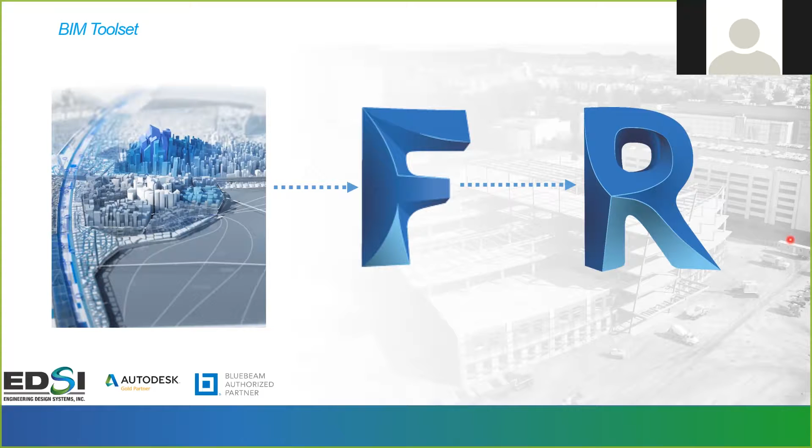The value of FormIt and Revit. There are a couple key takeaways from this workflow that we would really like to emphasize to everyone. When it comes to conceptual massing, FormIt models become Revit mass families, which support wall by face, curtain system by face, and roof by face.

FormIt levels become Revit levels and support floor by face and floor plan view creation. FormIt models with materials applied import to Revit with materials intact for visualization.

When it comes to conceptual modeling, groups in FormIt can be categorized to Revit to become Revit families, such as generic models, furniture, or specialty equipment. FormIt models can be imported into the Revit family editor to create RFA of any family category with materials. Revit families can also be exported to FormIt and then in the future converted back to the original Revit family.

The interaction between FormIt and Revit. The import FormIt to Revit command adds FormIt models into an existing Revit project. The FormIt origin point and the Revit base point are used for reliable placement of imported FormIt objects. The group name in FormIt is remembered upon Revit import for use with Revit filters, and Revit system families can be exported to FormIt using SAT export options.

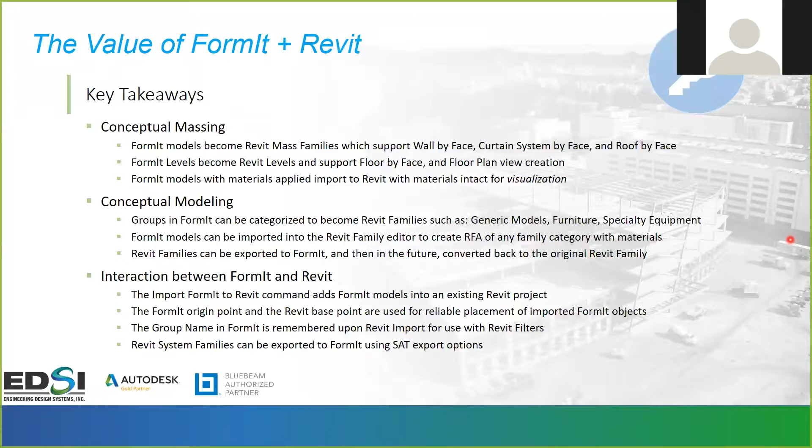The base file format of FormIt is from a 2016 platform. When importing to 2017 and 2018, you will notice a model upgrade dialog box. Depending on the file size is how long this process will take. The example you are about to see took a few minutes, but no more than 10.

As you know, if you put in location information in FormIt, Revit keeps that information and reads it. Additionally, masses typically aren't visible in plans and elevations, so you will want to ensure that these are turned on. That way you can see the imported information. The levels transfer and are present, but there are not views automatically created to go with them.

There are a few differences when it is converted to Revit 2017 versus 2018. 2017 will not retain material information, but 2018 will. 2017 will import sections as masses, and 2018 will only import sections if they are turned on and visible within FormIt.

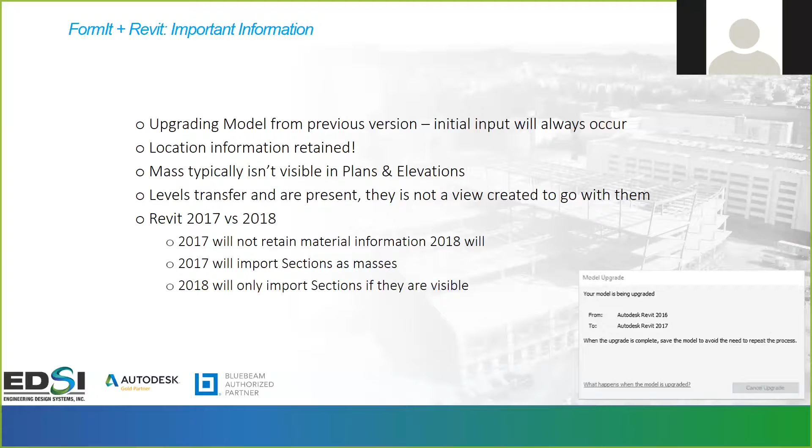Okay, now let's move to the software demonstration. Excuse me. So if you joined us for our last webinar, this is the model that we have created. This is our conceptual design for the model that we will be doing. And the white boxes you see are just some periphery information for site context.

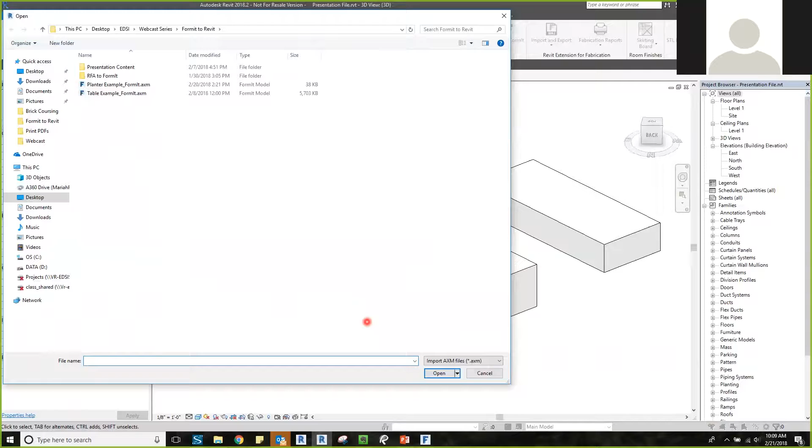When we move to Revit, I have already imported this to save us time. But to import, you would go to the Add-ins tab and then the FormIt converter. If this is not available on your machine already, we can easily provide you with a URL to download this. Under the import FormIt, you would want to import your FormIt to Revit. This will bring up a dialog box. You path to your selected file, and then you click open. As we know, it'll take a few minutes, but not very much at all.

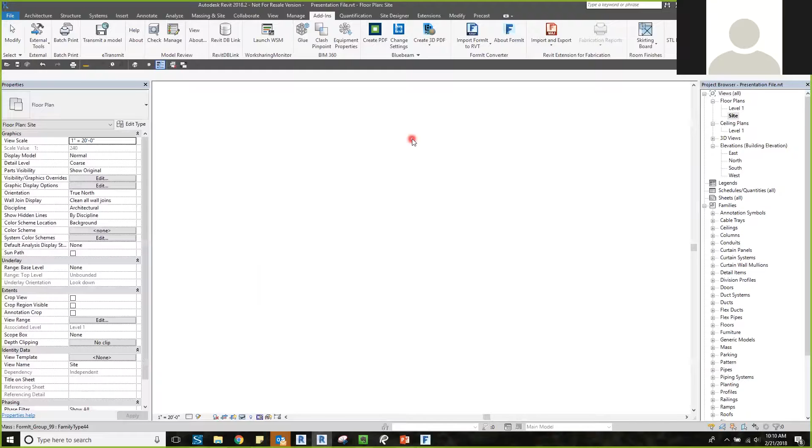So one of the most important things when you first import is to understand whether you have set a location within your FormIt model. If you have, one of the first things that we want to do is to set our true north versus our project north. One of the easiest ways to do that is to have a level 1 plan and a site plan open concurrently.

As we see the site plan on the left-hand side, it is rotated and its orientation in the properties palette is set to True North. If we look at the level 1 plan on our right-hand side, under its properties palette, it is set to Project North. This is probably typical of most of your workflows. Now, to set Project North, a lot of times what many people would do would be to select all the geometry and rotate it. But Revit has a nifty little quick tool for us that helps us rotate Project North.

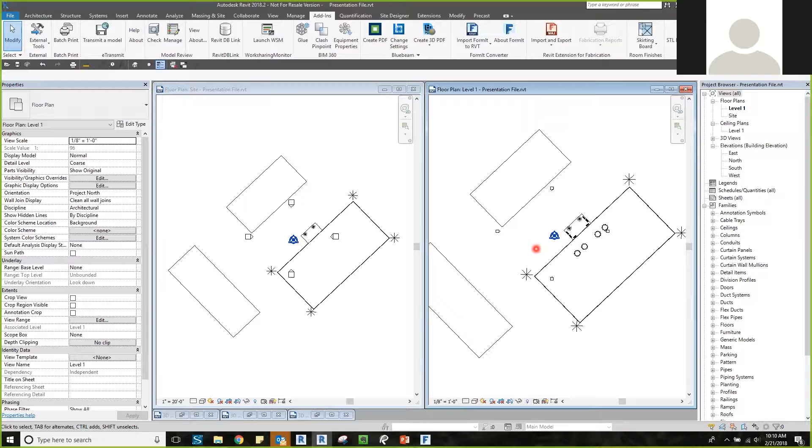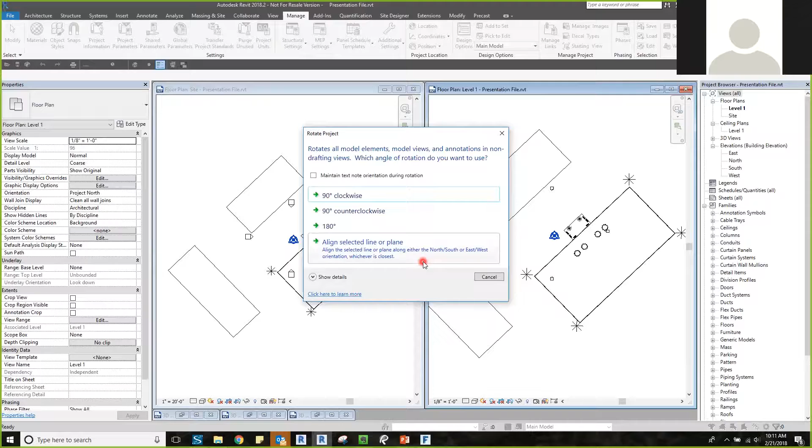It is located under Manage, Project Location Panel, and then Position. We want to select Rotate Project North. This will bring up a dialog box that will give us our options that we're allowed to use. We're going to use the Align Selected Line or Plane. I will come into level 1, zoom into a line that I know I would like to be horizontal across the page, and click this line. Revit will sync, and it will automatically alert you of the number of items that have been rotated.

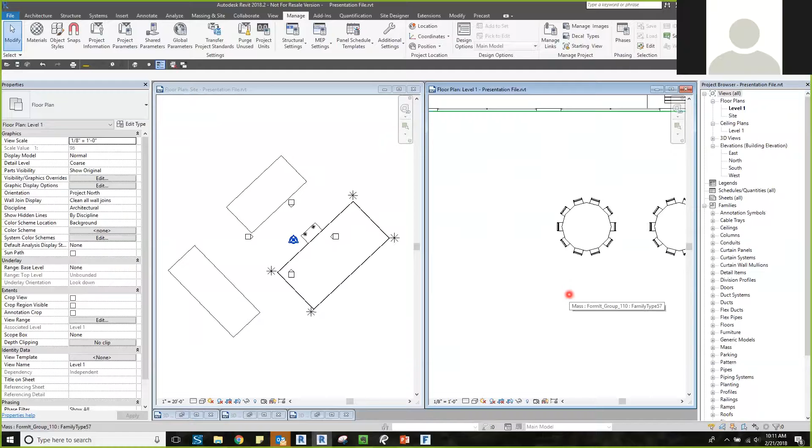Simply press OK. Now, if we zoom out and compare our level 1 on the right to our site plan on the left, we can see we have our True North versus our Project North now set. And if you want to double check even more, you can go back to FormIt. From your top-down view, you can see how the True North arrow is pointing north and our buildings are slightly rotated.

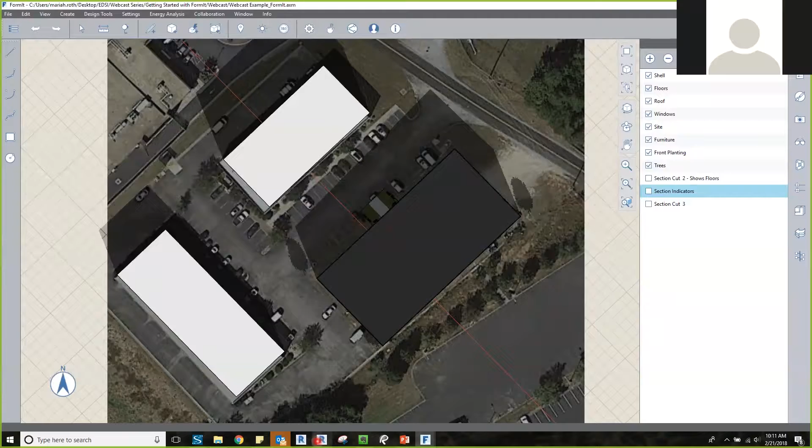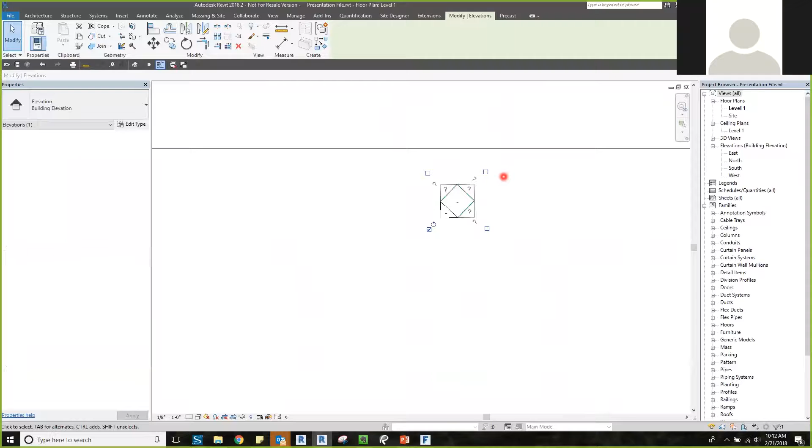Enlarging level 1 plan. As we see, Revit does rotate other annotation items, such as our elevation views. This is an easy element to correct. If we zoom into one elevation and select the building elevation, we see this circular rotate item that appears. If we click on this, it will easily snap to an orthogonal view in relation to Project North.

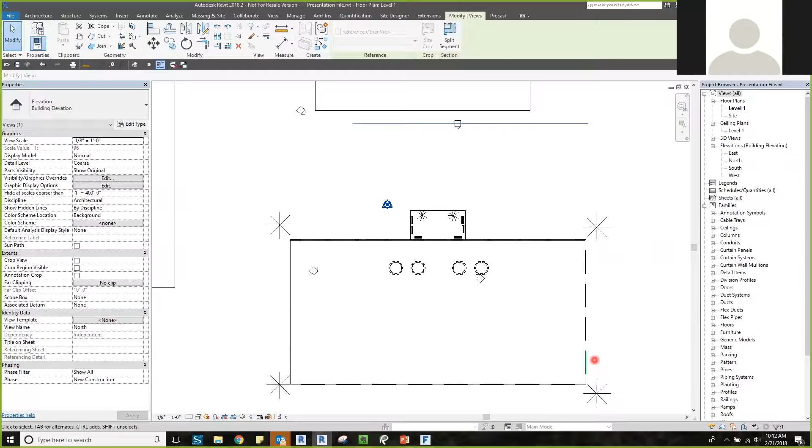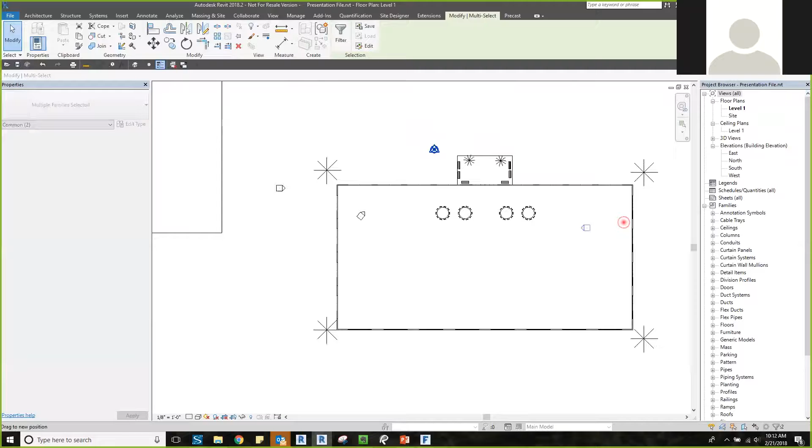And of course, we want to ensure that this is our north view in relation to where our project is now sitting. So I'm going to do these for all of the views and kind of place them a little bit closer to my building. Now we have our Project North and our orthogonal elevation set, and we're ready to continue working.

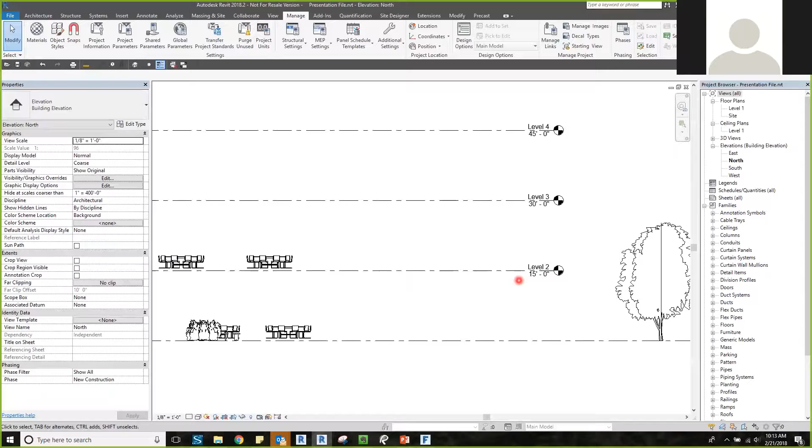One of the other items I mentioned was levels. As we see in our project browser, we have our level 1 and our site. But if we go to our north elevation, we see that we have our level lines created. And as we know, the black represents that there is not a view to go with them.

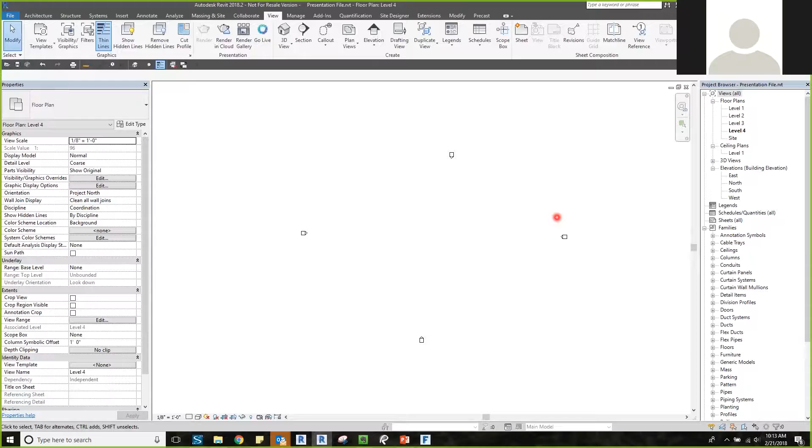So if we go up to View, Plan Views, and Floor Plan, we can now create the other views in relation to our levels that were already created. And as you see in level 1, we are able to see the mass import. On level 2, not so much. So as I told you all, you need to make sure your mass is turned on, and it wasn't turned on in mine. And now we're able to see the import.

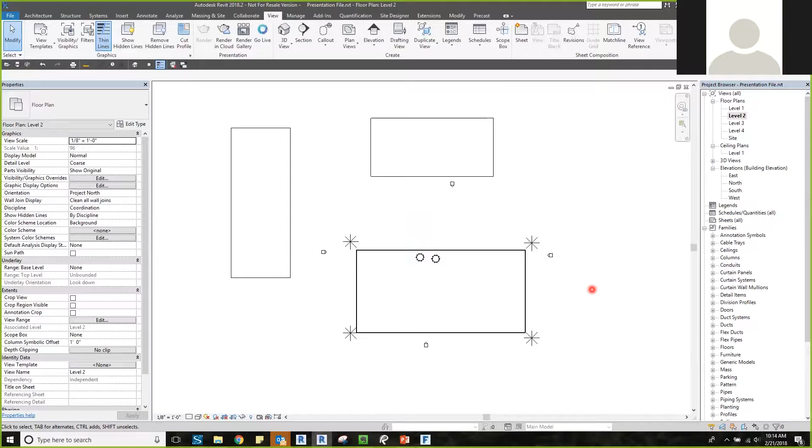All right, moving forward, using your FormIt model to create your Revit geometry. Currently, all of what you are seeing on your screen is the FormIt import. There is nothing in here that is Revit geometry yet. I find it easiest personally to use either a shaded, consistent colors or realistic type of view to be able to place your walls and other items.

To place your Revit walls based on the FormIt model, there are a few ways you can go about this. You can go under Massing and Site, and then select Wall on the model by face. It will automatically bring up the wall command with the picked faces option already selected for you. Additionally, you can use the keyboard shortcut command to get to this and choose pick faces yourself, or you can use the wall command under architecture and still get to this command. The choice is yours in whatever workflow you want to use.

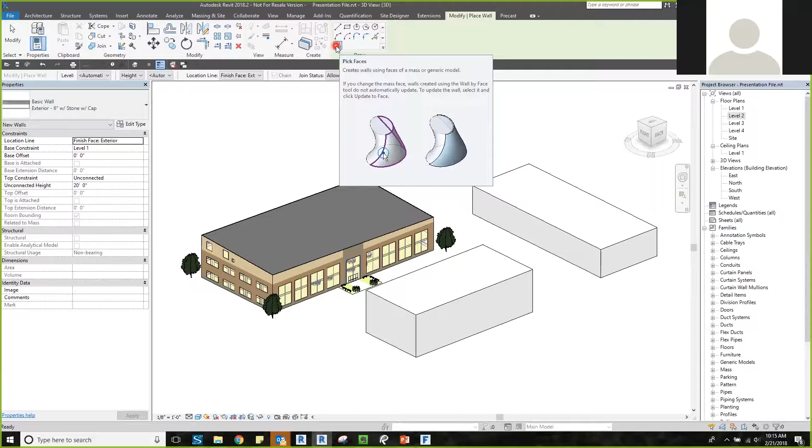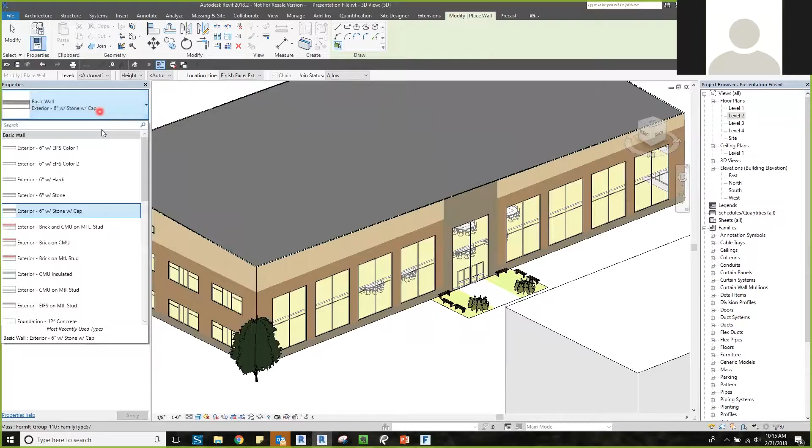We'll see our options bar appear just as any other time we are creating a wall. The one thing we really want to pay attention to this time around is our location line. For this particular example, we are going to use the finish face exterior, as I know I want to keep these specific bounds moving inward from my building. So under our properties, we want to ensure that we have our proper wall selected.

So I will zoom in to the FormIt model, and if I hover over, you can see the green selection line is picking that almost a water table reference to place the wall. If we simply click in place, you can kind of now see an overlapping geometry of our FormIt model and the Revit model.

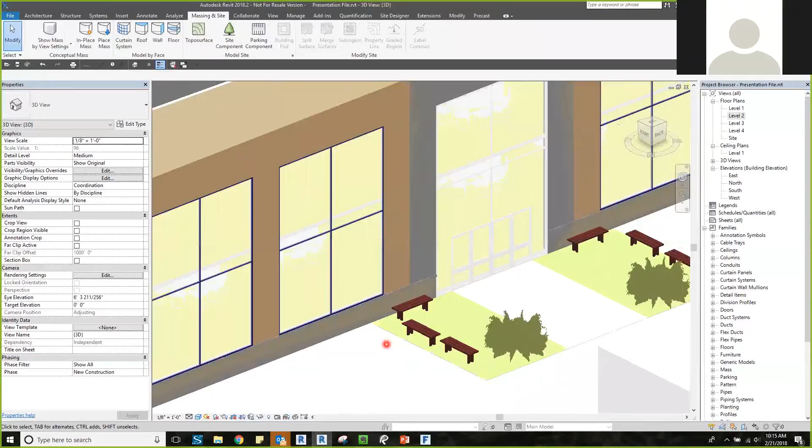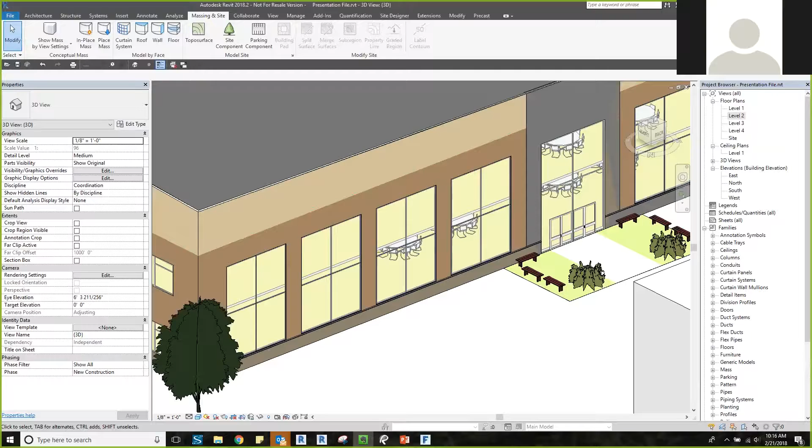As reference, FormIt will recognize if you have placed a dividing line, such as what you see right here between the two tan colors within Revit. This can be useful for water tables, splitting elements such as different materials in Revit, whatever you would like to use. So I'm just going to go through and as reference create some more walls for us so that we have some understanding of how our FormIt model transforms into a Revit model.

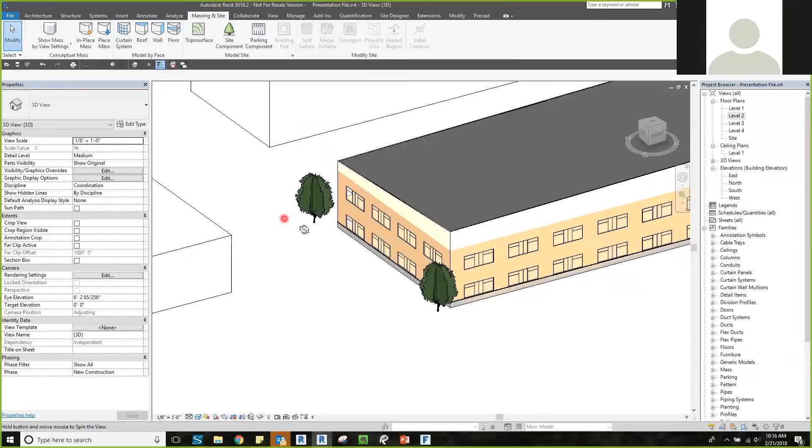All right, moving on to doors and windows. Unfortunately, doors and windows are a little tricky going from FormIt to Revit, and that is because they are hosted elements, and FormIt does not understand hosted elements at this time. We must consider if the openings that we consider windows are true window elements or if they can be referenced as a curtain wall.

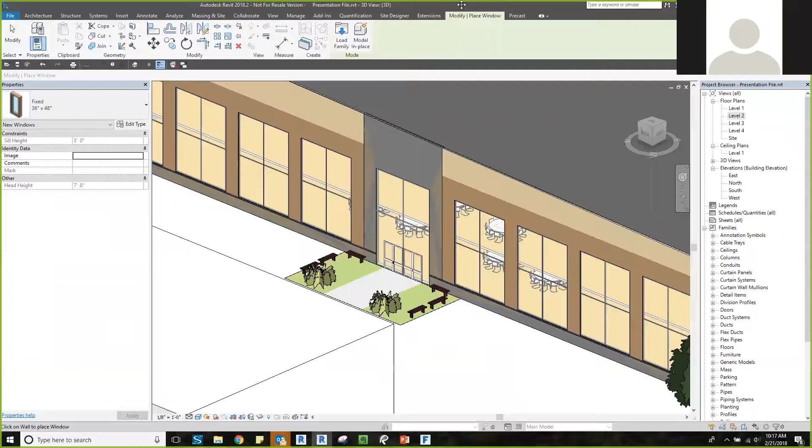If they are a true window element, such as this one that I have selected, we need to ensure that they have a proper host to live in, such as the wall that is extending up in the front facade. In this instance, we can easily place these in here and they will go and be hosted. Now you don't see these cutting through because the mass of the FormIt model is still behind our Revit geometry.

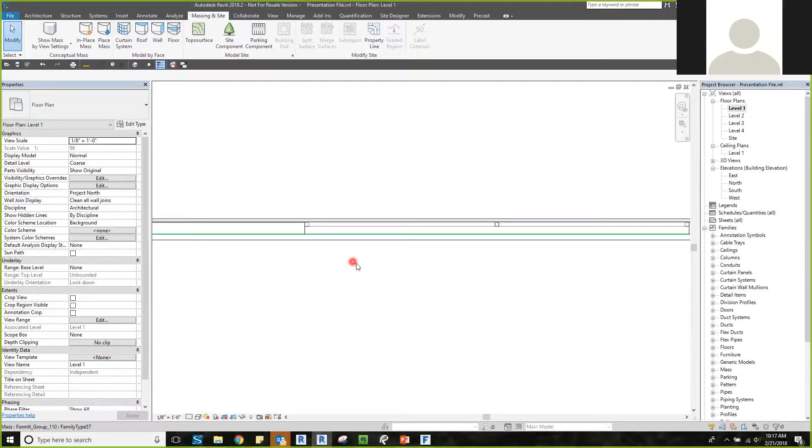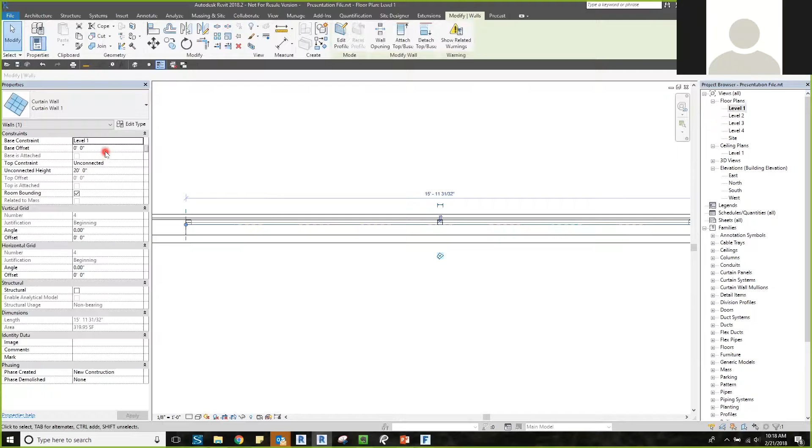If our openings are to be something of a curtain wall, like what you see here on the front facade, something of this scale is easiest to quickly redraw and place your mullions where you would like to have them placed. So what you can do is go to level 1, do a wall, curtain wall 1, place it here. And of course, we need to ensure that our constraints are properly set.

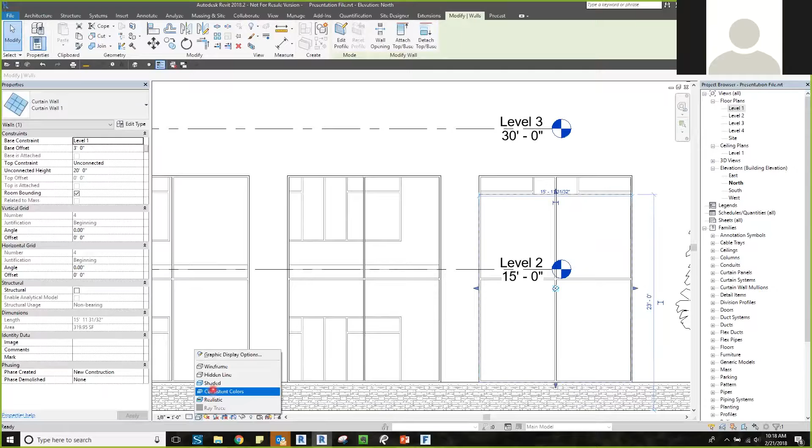And if we go to our elevation, again, didn't make sure my masses were turned on. We can now see that our curtain wall is here. Let me turn this on consistent colors as it'll be a little bit easier to see. So we can bring this up. It automatically will snap kind of to those imported elements.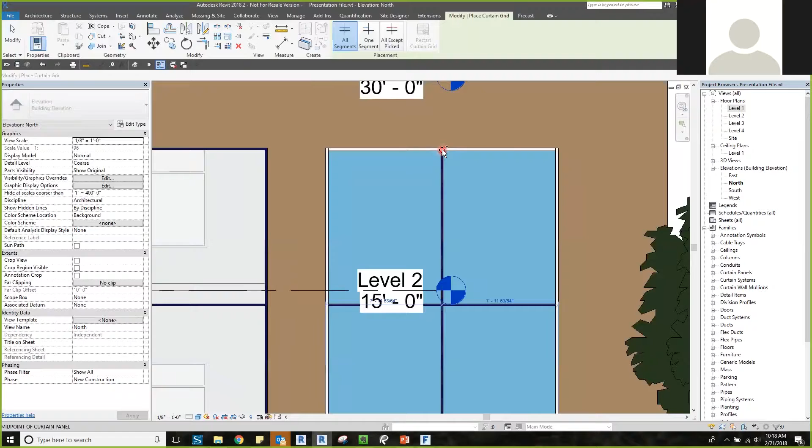And then we can come through and place our mullions on all of our grid lines. Create some additional grid lines that are directly splitting the curtain wall element. And then in this instance, it would just be easiest to simply copy and move from place to place.

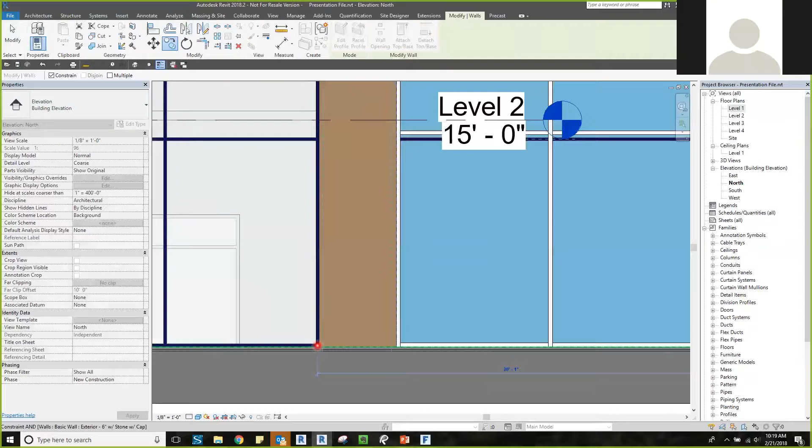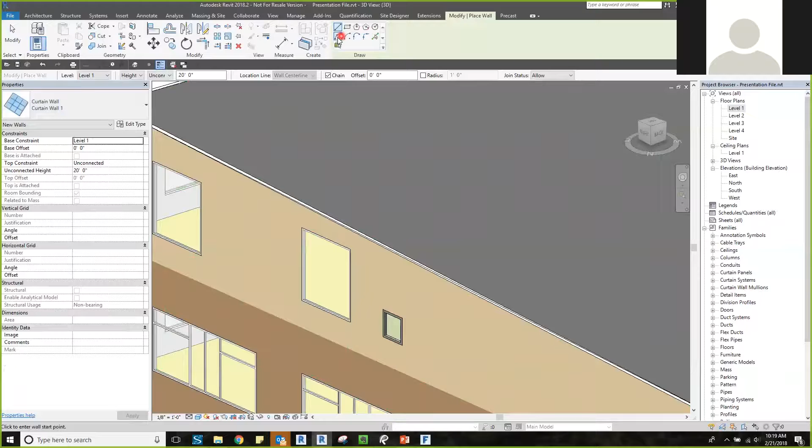Sometimes, not always, Revit will recognize elements such as this square window. It will recognize the glass. So you can use a curtain wall to do a pick faces and it will highlight that interior portion of the glass. You then in turn would just have to stretch the mullions to where you would see them fit.

Unfortunately, this does not work on the larger elements because Revit reads all of the individual glass planes and then will try to create a curtain wall system within each one of those. And you'll end up with multiple mullions that would not be useful. That's why in this case, it is just simpler to redraw.

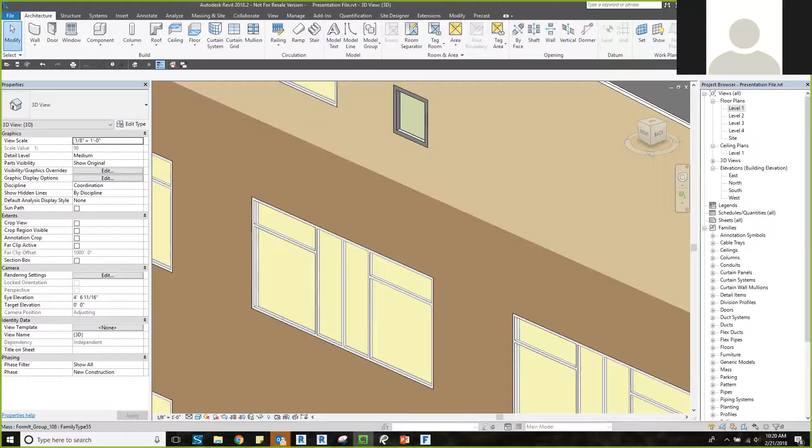When it comes to doors, they are, as we know, a hosted element. So you just have to place them in as a typical door. There's no workaround like a curtain wall to place doors or anything of that sort.

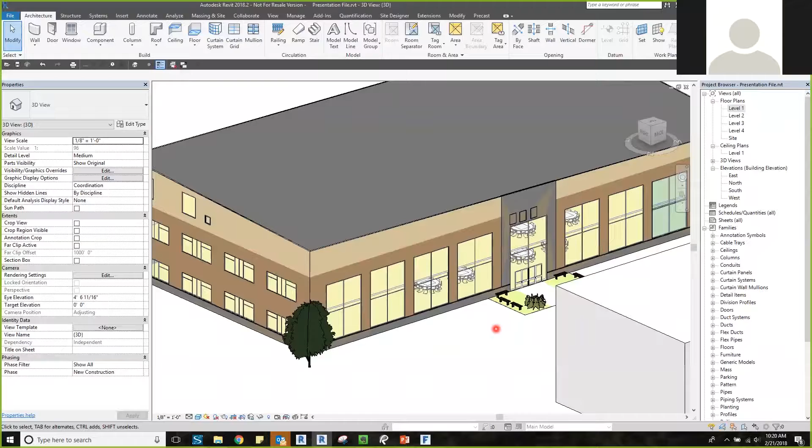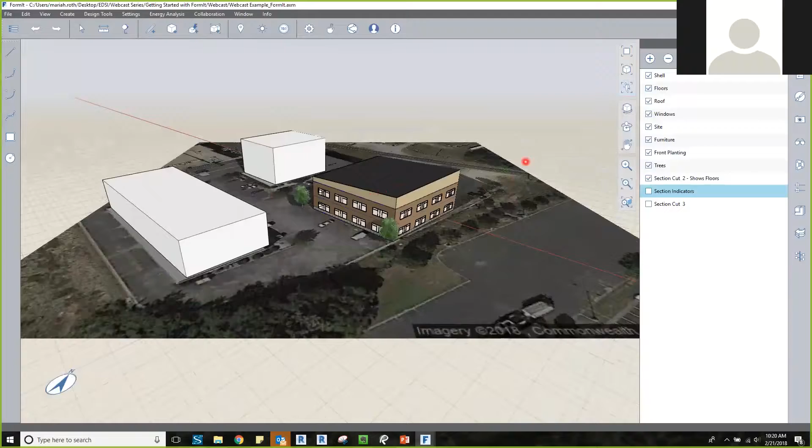Moving forward with floors. Floors have a very specific workflow that begins with correct modeling techniques in FormIt. As I switch back to FormIt, and I turn on a section cut that I already have, and we zoom in, we can see this blue line that is indicating our levels that are in here. The bottom plane of your floor mass needs to be snapped to this blue line. That way, when you bring it into Revit, we can easily place floors.

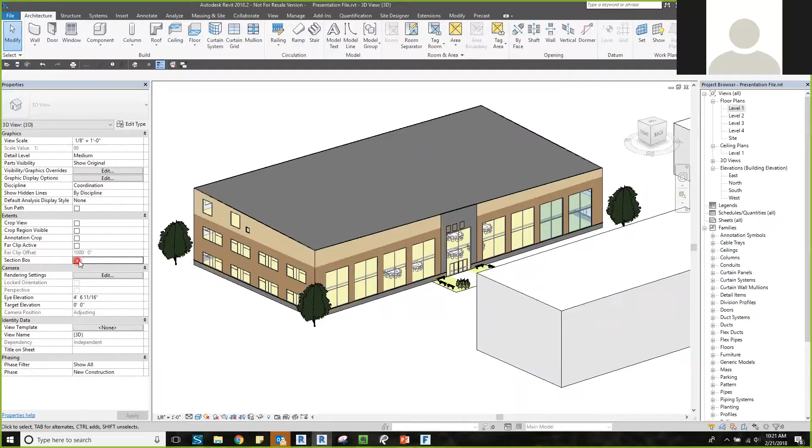So I like to turn on a section box within a 3D view and kind of bring it back a little bit and cut that front facade off. I then can go to the massing and site and floor, and I can do a select multiple. Now what you will want to do is hover over the bottom plane of that floor that you created, and you will see a mass floor family type, level 1 face.

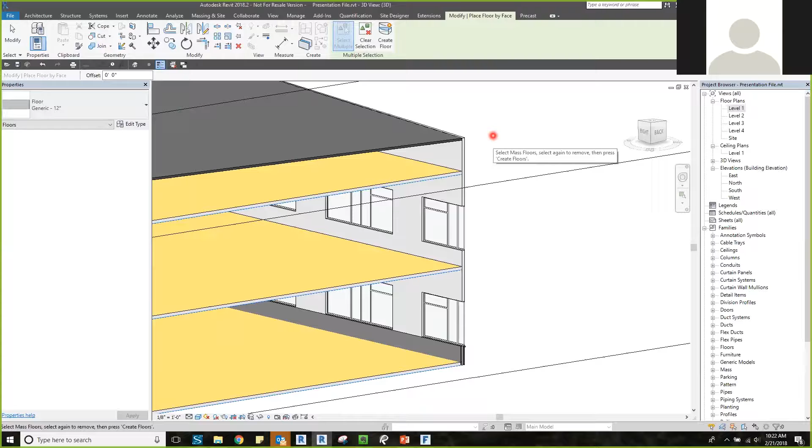So if we select that one, and then we hover over level 2, you will see that the same thing appears, and you can click again to select another floor, and then the same with level 3. And in our properties palette, we wish to ensure that whatever floor we want to be created is what we have selected. After you have selected your items, you can go ahead and create the floor. The top of that floor will be hosted to the bottom plane that you have selected.

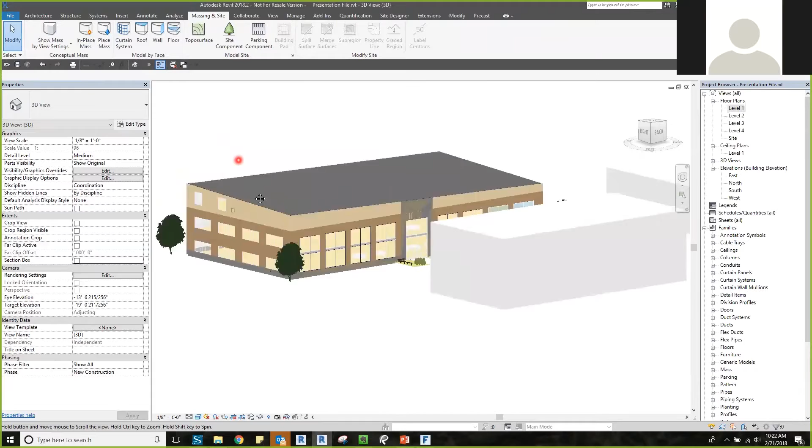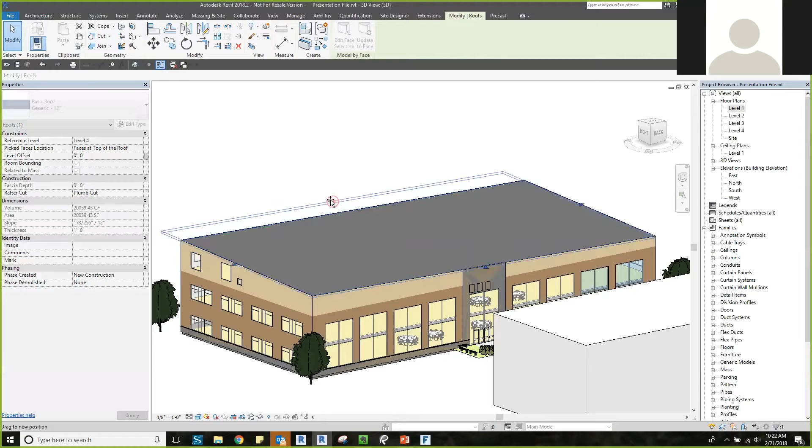All right, if we turn our section box off, another item that we can use to create with our FormIt geometry is a roof. However, personally, I don't particularly like this workflow because if we select this mass that is representing our roof and we create our roof, I cannot come back in here and change the slope or edit the boundaries of a roof like you are typically able to within Revit. All you can do is drag with some stretch arrows in any of the directions you want.

If this is exactly how you want your roof to look, then this will work perfectly for you. If you by chance want to possibly edit in the future, then you might just want to take those few extra moments and create a roof based upon your bounding walls.

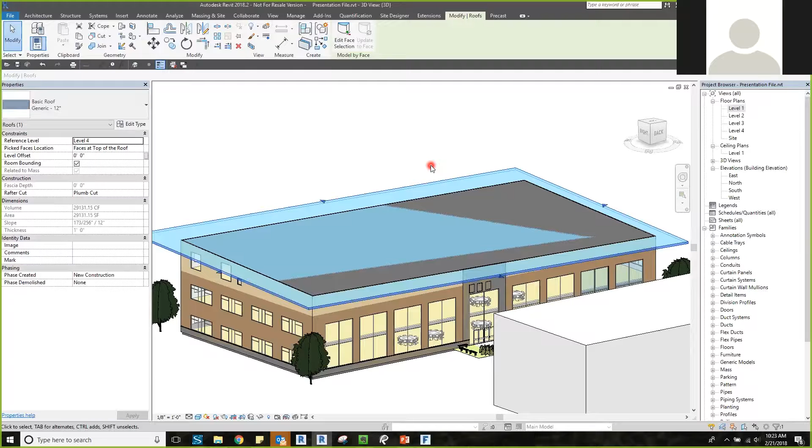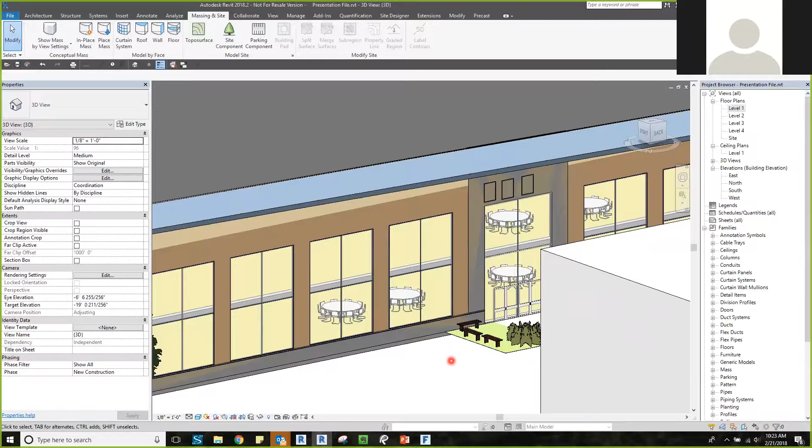Okay, moving to the content items within FormIt that are transferred to Revit. They were very important in FormIt to make our categories correct. And the categories within FormIt we have are the mass, casework, entourage, furniture, generic models, parking, site, and specialty equipment. And while these categories certainly don't cover everything, Revit can be quite helpful in moving forward.

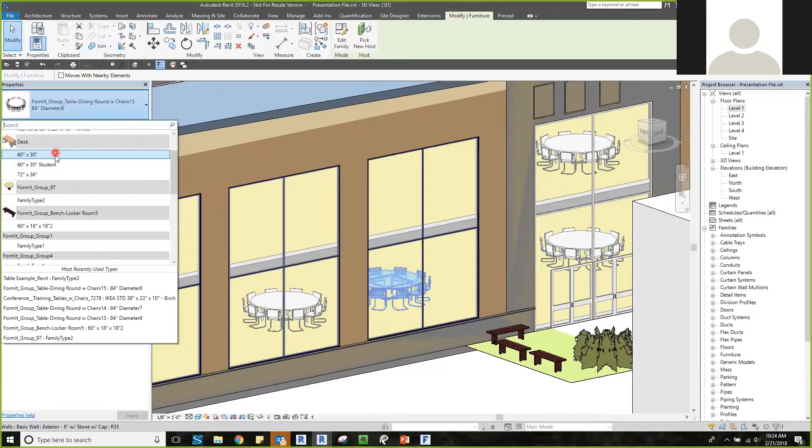If we select this table and chairs within our building, we can see that they are automatically already set to furniture, and that is because we chose that within FormIt. We are now able to come through and change it to another table that we would like. Let's pick this different conference table. So as you see, that is now changed to that other one. Unfortunately, it's hosted to the bottom of that floor, so you would need to move that back up.

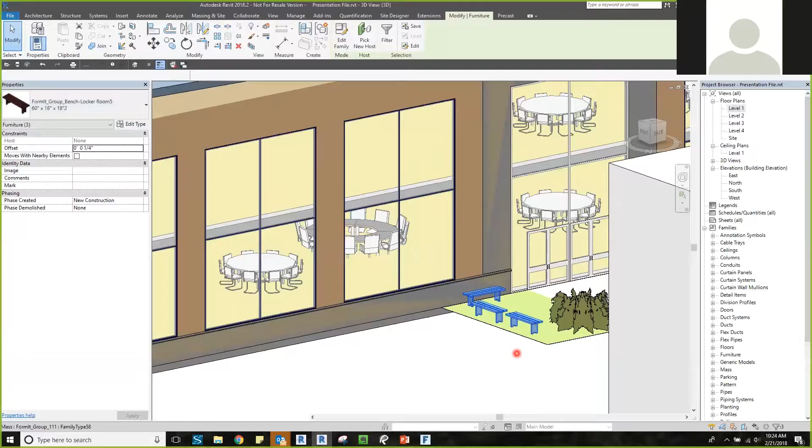However, any of the furniture that you would like, you can change to a different item, such as this, which can be very helpful if you have a generic chair in FormIt that you like to use, and then have a particular one that your client would like to see once you move to Revit.

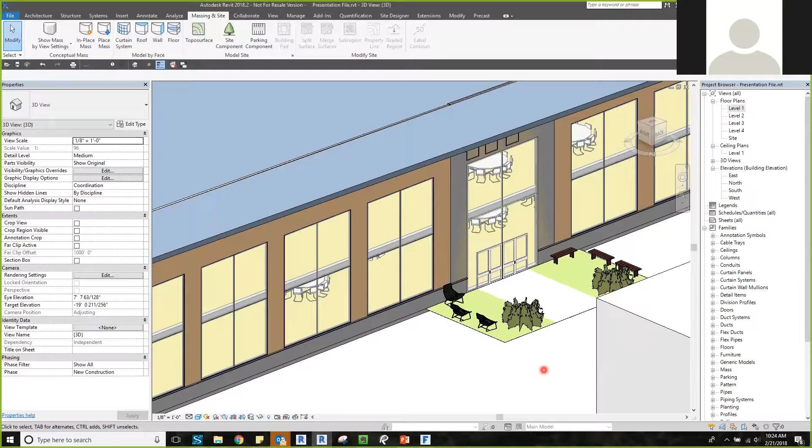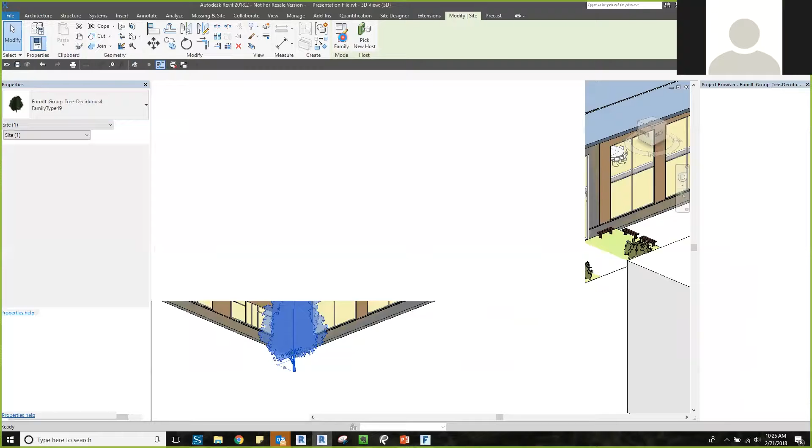One of the things you can do if your particular category isn't allowed in FormIt is to categorize the FormIt geometry as something similar. In this case, I have created the shrubs and the trees on the site category. And what we can do to make these planting, as that is what other trees in Revit are considered, is to quickly edit the family, and then under the family category and parameters, we can simply tell it that it is planting, hit OK, and load into project.

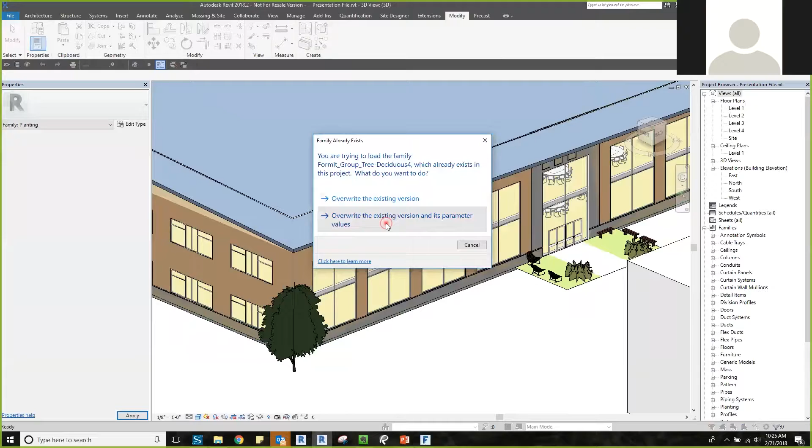And we're going to make sure it's the appropriate project, hit OK. And then I'm going to overwrite the existing version and its parameter values. And now we see it is now set to planting. So we can come down here and now we can choose any of the other planting options that we have.

So just as Revit can read FormIt geometry, we can take SketchUp, bring it to FormIt, and then in turn to Revit. And in turn, we can take Revit content and put it to FormIt. Let's look at that now. So if we are in FormIt, I can open a SketchUp file, which we know is SKP.

If we can open it, we see this geometry that is brought in. Probably not the exact colors that our client wants. So you would go ahead and change any of the materials that you would like. Under the visual styles, you want to identify any watertight issues, as watertight issues are the key when it comes to moving from FormIt to Revit.

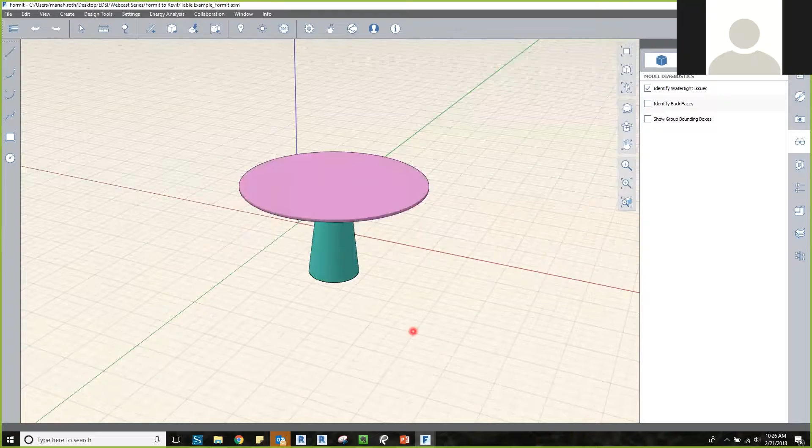So if we then look back at the other table that I had created, I already went and edited the materials so that I could use this within my Revit model. So I just saved this file locally. Then I went to Revit. I created a new family type. And I imported the geometry just as I would in a Revit project, which is under Add-ins, and then import FormIt to Revit.

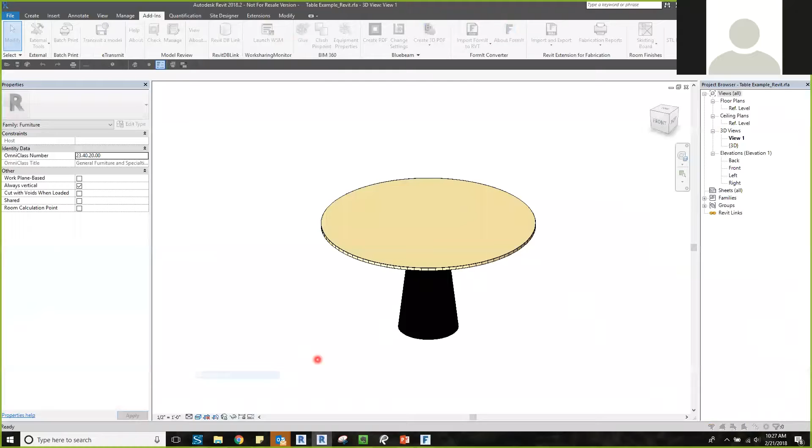Now, as a disclaimer, when you do bring in FormIt geometry to Revit, it will give you the circular dividing lines. That is just something that Revit does. I have not found a workaround, but if we're rendering this in shaded or consistent colors or realistic, that should not really be an issue for most people.

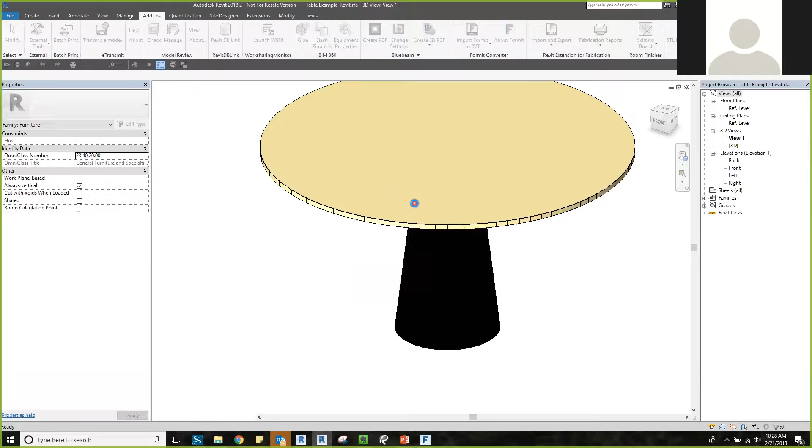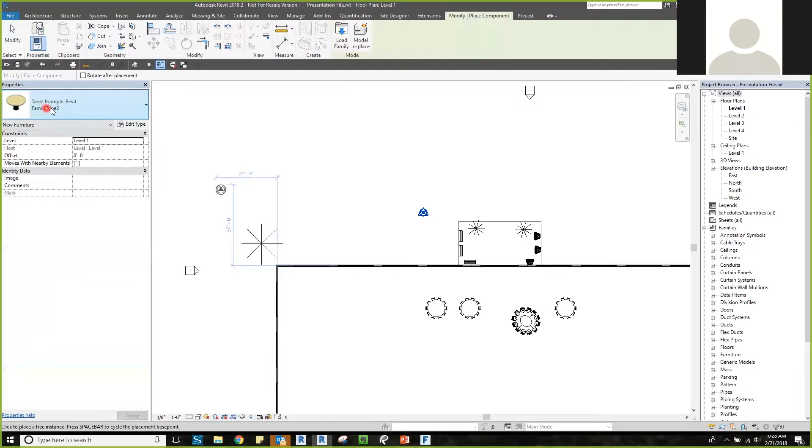We then can go and take this and load this into our project. And I already had it in there, so I want to overwrite the existing. And then we can go and place a component, and we now see that our table example is able to be placed within our model.

So again, initially this was SketchUp geometry that I had found online. I liked the design of it. I brought it into FormIt, edited its materials, made sure it had no watertight issues, brought it into a Revit family, and then loaded it into the Revit project.

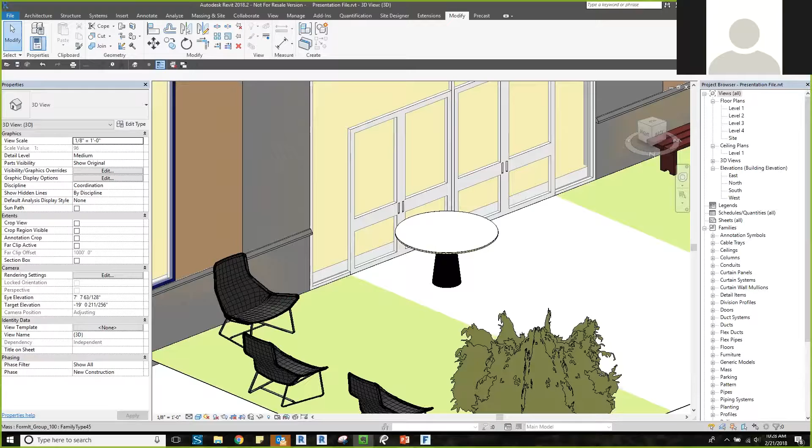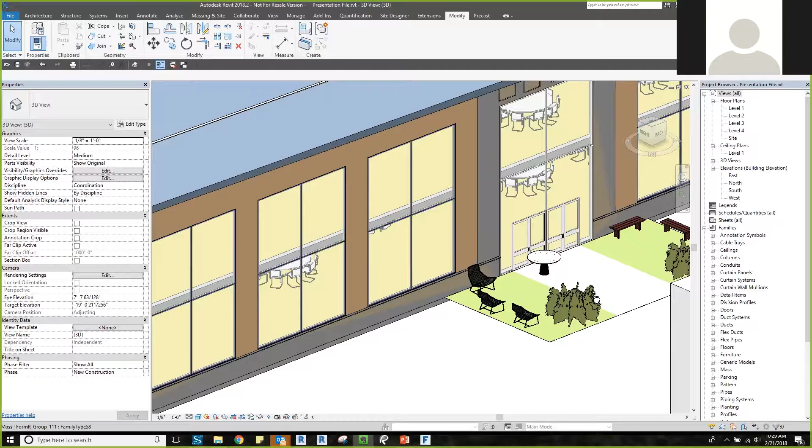If we were to move from Revit to FormIt, that can be done with any of the items that are considered FormIt's categories, which are mass, casework, entourage, furniture, generic models, parking, site, and specialty equipment. We can take that and convert it. And that's actually what this table and chair is that you see inside. It was previously converted geometry.

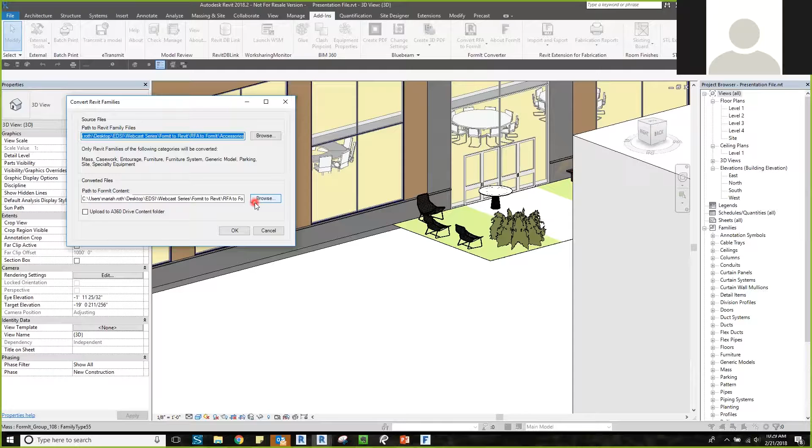Now, how we would go about that. Under the add-ins on our FormIt converter, if we do a drop-down, we can convert the RFA to FormIt. It'll bring up a dialog box. And here is the path to the original Revit family files that you would like to use. I've already gone through this process with the site accessories, so I won't do all the steps. But you can browse to whatever folder those original files live in. And then you can browse to where you would want that new FormIt geometry to live.

I have already done that with the site accessories. As you see, the original ones here, and then the AXM files live here. Mariah? Yes. Would you say that it's important to have a permanent location where you're going to have your Revit families and also your FormIt families?

Yes, I would say that's very important. The one caveat I would say is possibly if you are using all of the default Revit geometry, as all of this geometry is automatically installed on any of the machines that Revit is installed on. But if you are converting that Revit geometry to FormIt, I would ensure that you have that living in one place, perhaps on a server that multiple users can access. That way they know what has been converted already or what might need to be converted in the future for your use.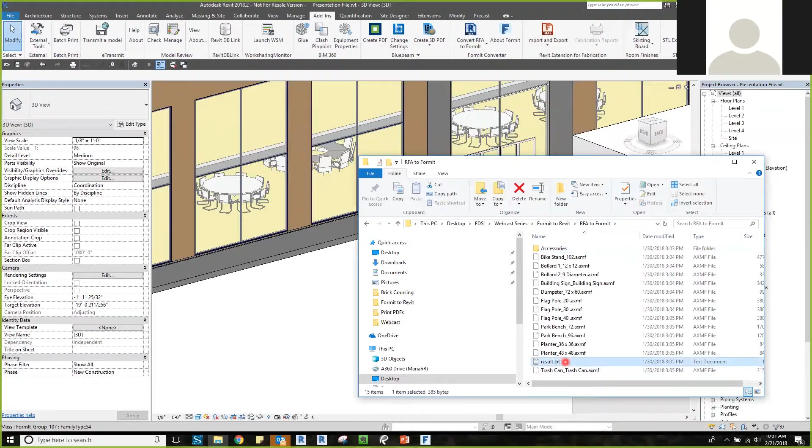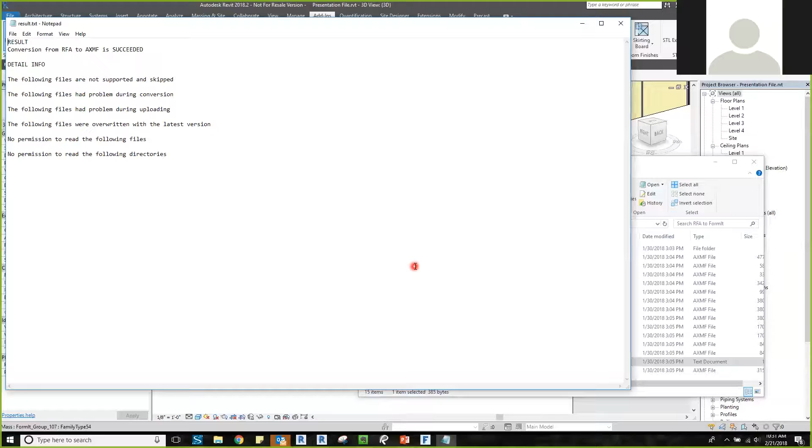When you do the conversion, the converter tool will give you a TXT file as the result. And it will tell you if anything was not supported, skipped, or had a problem. I know Douglas and I previously worked on something and it would not convert for some reason. We actually never really figured out why. But it alerted us in this text that that particular family was not converted. And it will alert you if only one item out of an entire folder of say 10, 20, 30 items is not converted.

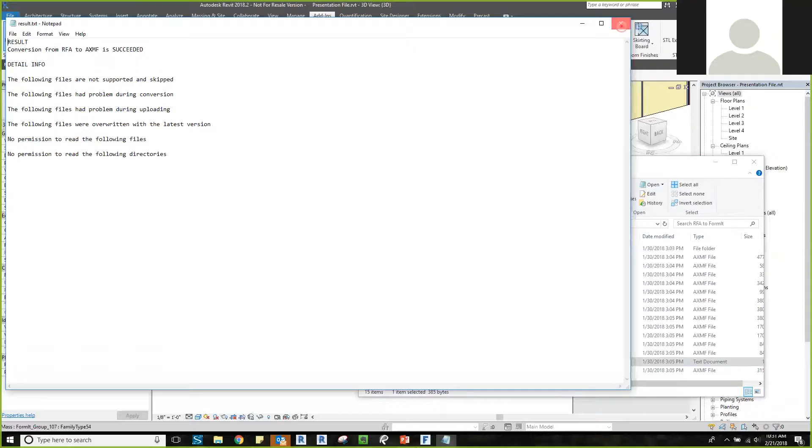So then we can go back to our FormIt, and under our content library, we can link to where that particular converted items live. In this case, I have placed the planters in the FormIt area, as you see. I have in turn saved it locally. You can also save it to A360 if that is your preferred method.

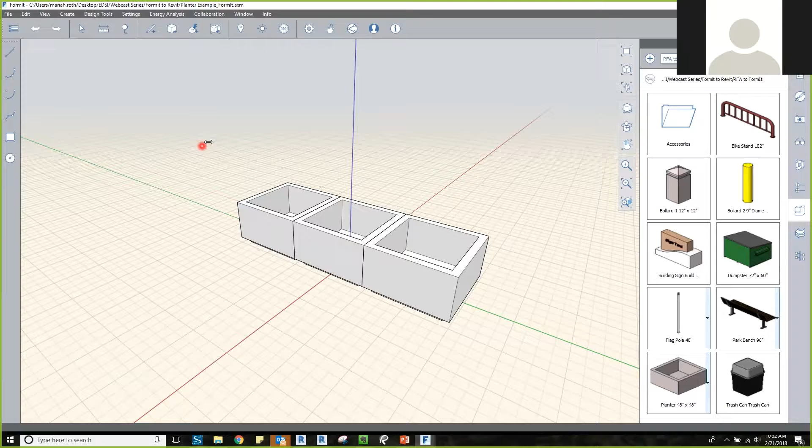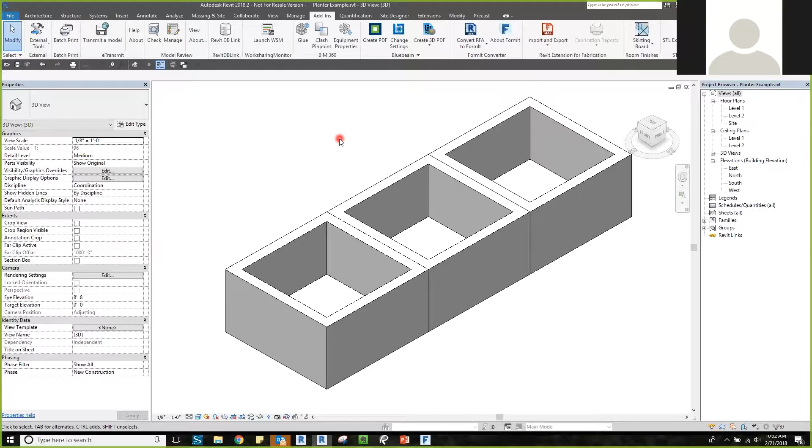I then have come back to Revit and imported that FormIt geometry again with the import FormIt to Revit. Now, as we know, this was originally created from Revit, so we want to be able to bring that original file information back into it. And what we can do with this is we can reload families. Now, I do have to path to the very original location of all this information, so bear with me while I do that.

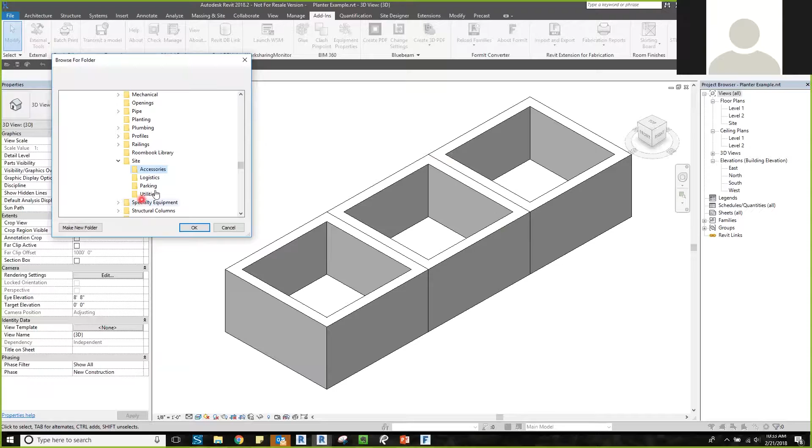And as we know, it was site and then accessories. And if you see in the Revit background, we're on realistic right now, and it's just kind of white and gray boxes. And if we press OK, this is remapping to that original family that we converted. And it says the reload family succeeded. They are now replaced with the original Revit families.

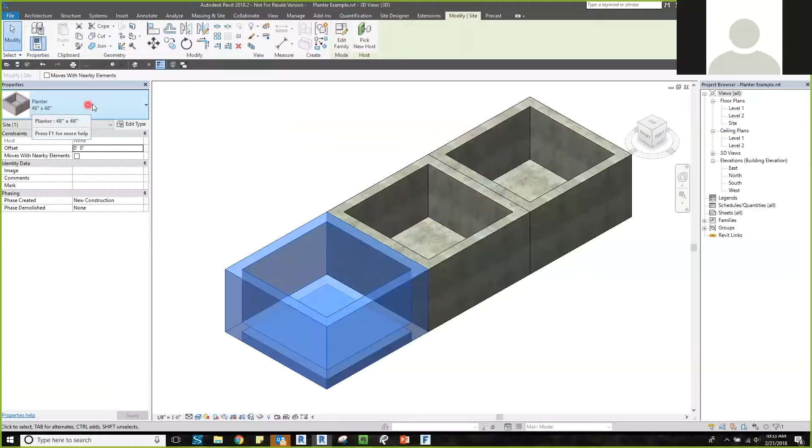And as you can see, the materials also changed. So if we click on these, this now says the planter. If I would have clicked on it before, it would have said FormIt group and its specific number.

So that is all I currently have. We're going to open it up to questions at this time. Please feel free to ask anything, or if I need to redo something to clarify, I will be happy to do that.

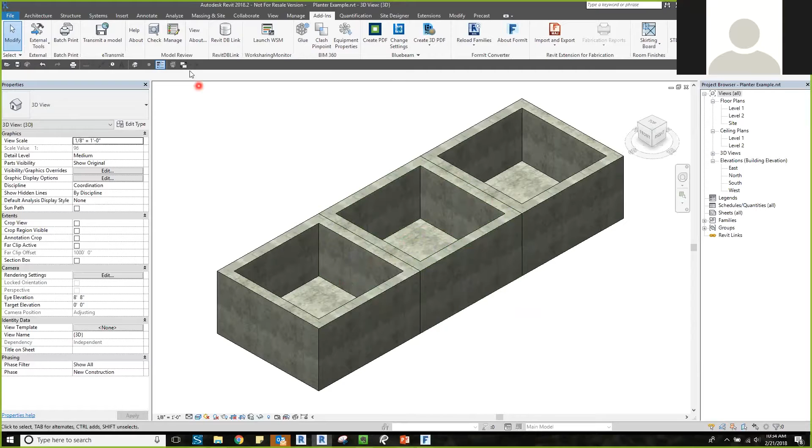That was excellent, Mariah. I really liked the workflow that you were going through, especially walking us through how to select a wall and place a wall, because it is extremely important when you import in your model and you're ready to place your walls in, that you have your walls going in the right location line. I also like the fact when you talked about the floor, when it comes to within FormIt, you have to select the bottom portion of it. Could you explain on that note what was happening before, just a little bit on it?

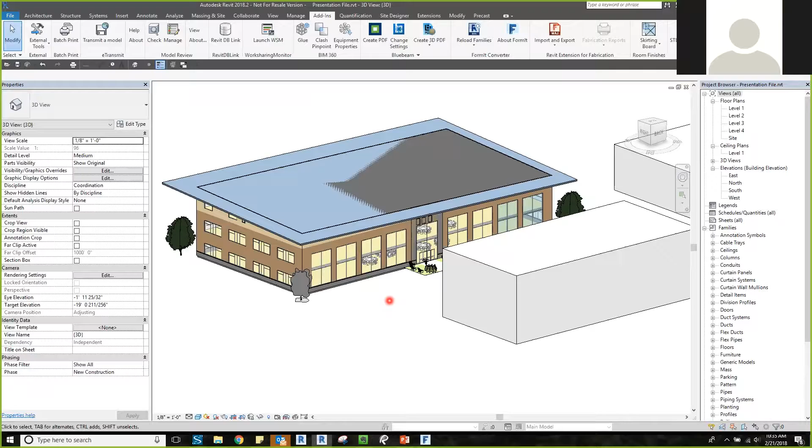So what was happening before, and I'll use a section box to kind of reference this. Within FormIt, I was having the top plane of this mass floor snap to that location line of the floor within Revit. And unfortunately, it's a bug we found from Autodesk. It is a bug within the converter tool that it will not recognize if the top plane of your mass floor is snapped to that level. It will only recognize if the bottom plane is. So that's quite important to remember.

But as soon as I spoke with Autodesk and they kind of helped me through that, we realized what the issue was. And it's a very simple workflow to remember. You just have to know to be able to do that. Right. And here's the other key thing. I hope you all are listening.

The key thing here is when we were using the software, we had a particular workflow in our own minds on what to do. And this is not necessarily just with Autodesk products, this is with any product. You may have a particular workflow and you would think that you would get the same result based off of your specific actions. Well, this was something that was like a hair-pulling type of situation because it's like, wait a minute, we know this works, so what are we doing wrong? And as soon as we found out exactly what we needed to do and also the backstory on it, it allowed the process to go a whole lot smoother.

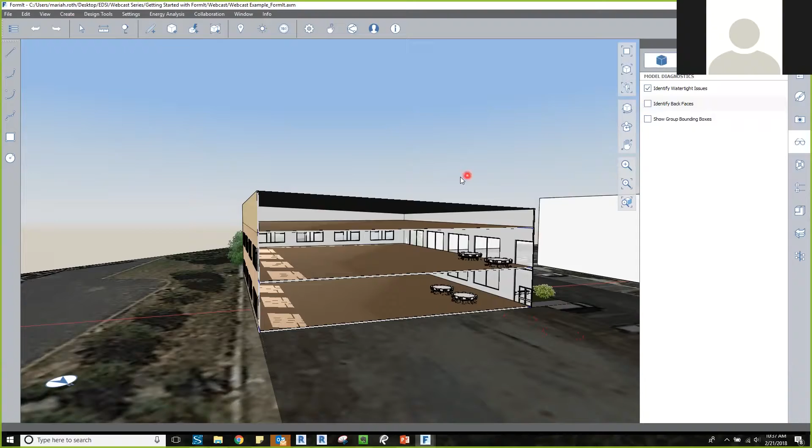Yes, watertight issues we found on another model that we were using. They create a lot of issues. Even if something is just a single plane, FormIt to Revit does not like that, unfortunately. So everything must have some sort of thickness to it, even if it's something as small as 1/8 of an inch. But that's just something to really keep in mind. Everything needs a thickness, and it is ideal if you have something grouped. It makes it a lot easier when you bring it into Revit.

Right. So basically, from a FormIt standpoint, hopefully some of you were part of the first webinar. This is the second part of the webinar. The first part, Mariah went over a lot of the key features within FormIt, and she covered a very good presentation on that. If you missed it, I believe it is up on our website, so you can go back and look at that. Of course, this is the second part of it, so bringing it into Revit.

But what I want to state here is, when you're in the conceptual aspect, the one thing which was key, one that she brought out in the first part of it, you want to have a good material library to pick from. Because what's the point of having this conceptual design massing building, but you don't have materials to place in there? And you also want to have a good library of content. And when it comes to this content, as you see here on the screen, she got trees, she's already covered furniture. And then on the last one, we talked about your windows and doors.

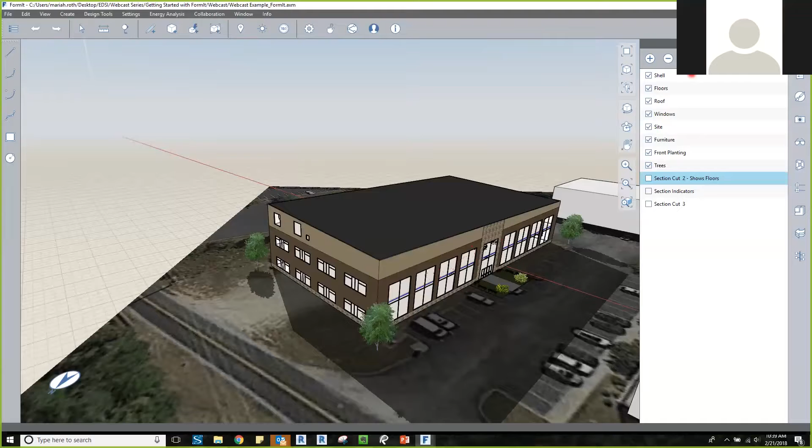Bring this into Revit, and now go to a floor plan view in Revit. And so from a floor plan view in Revit, as you see there, once you have your walls and windows, doors in there from the exterior, you can go ahead and start on the interior aspect of your building. Start putting in your interior walls, laying out rooms, and so forth. So, as Mariah already indicated, you don't lose out on any of the work that you have done from a conceptual standpoint.

Yeah, there's not much. I don't even want to say that you lose information, but something in reference to something like a curtain wall. It's just a little bit of remodeling, but you already have the information behind that you can easily snap to and copy and rotate and paste over. So you can turn that over very quickly and really start to get to the construction document type of modeling of dimensions and all that not so fun stuff.

Right. Another thing I like here is, and we haven't covered this, but when you convert that file over from FormIt to Revit, you can have a template already ready and available with the massing on, certain aspects as you're needing already set up for you. So that will make the process go even quicker when it comes to moving that transition on. So in general, Mariah, how much time would you think it'll take from a conceptual design and over into Revit to give it to someone to start doing interior fit out?